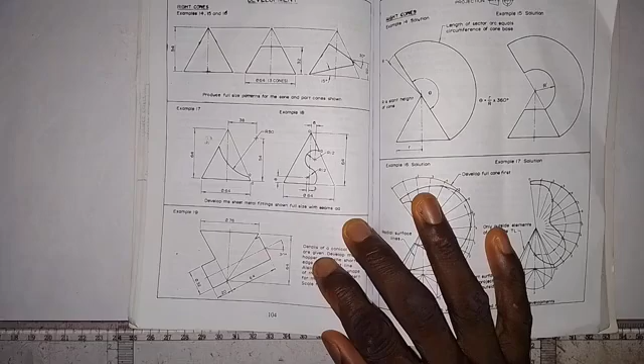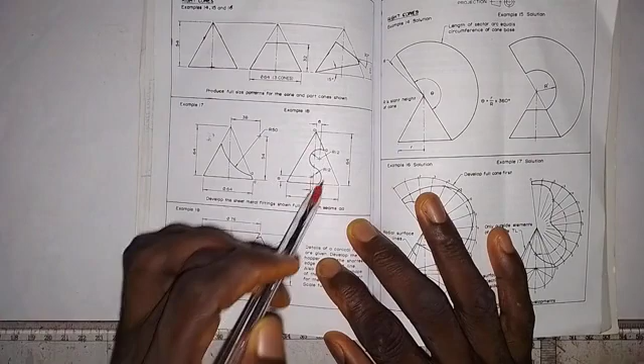Here we are going to solve this particular problem, and it has to do with the surface development of a truncated cone. This is a right cone, and as we see here, the cone is truncated in a very special way. So we are going to make surface development of this part, okay?

And the diameter of the circular base of the cone is 64 millimeters, and then we have the height to be 64 millimeters, and the radius of this arc here is 12 millimeters.

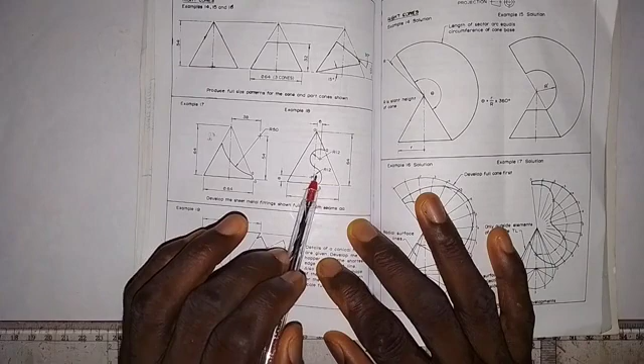And then, for us to obtain this point through which this arc is constructed, we have to take a measurement of 6 millimeters from here to here, and also we have to take a measurement of 3 millimeters to this side, and also we take 8 millimeters up. So that's where we are going to put the pinpoint of our compass with 12 millimeters to draw this arc.

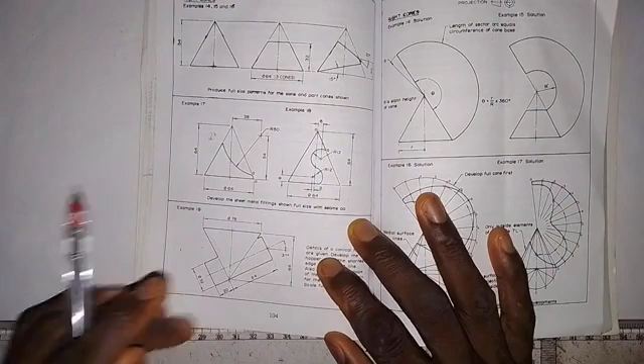So let's start and see how this work can be done. Don't forget that we want to make surface development of this particular truncated cone. So the first thing that we are going to do is to draw a horizontal center line, like this. Alright, then we are going to draw a vertical center line. We need to be patient to get this work done. We don't have to rush it. So we draw a vertical center line like this.

Okay, so as I've said, the diameter of the circular base of the cone is 64 millimeters. So half of 64 is 32. So we take a measurement of 32 millimeters here. So this is 32, and then putting the compass at this point, we are going to draw a semicircle like this.

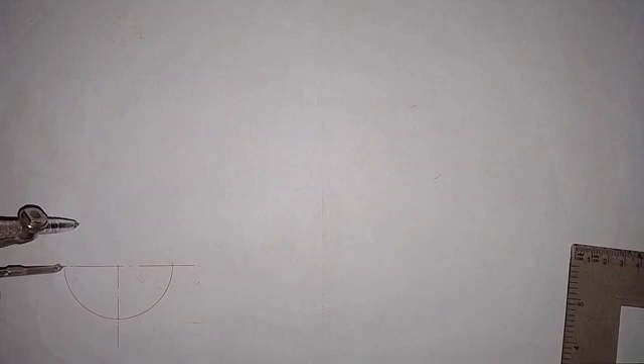Okay, so this semicircle, we are going to divide it into 6 equal parts. So putting the pinpoint of our compass here, make an arc here. Then we put it at this point, so we make an arc here. We make an arc here on this side. Then with the pinpoint at this point, we make an arc here.

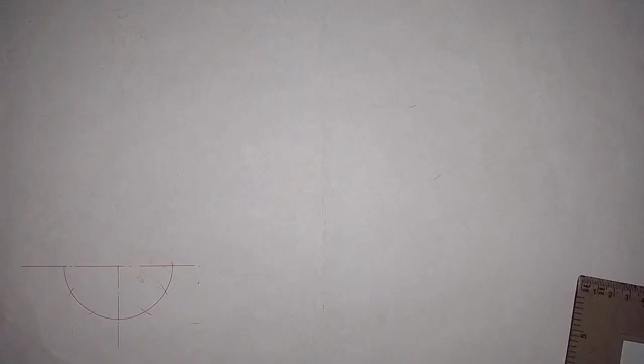So now we are going to number these points. Right from here, this is 0. This is 1. This is 2. This is 3. This is 4, 5, and then we have 6. Okay.

So having done this, the next thing is that we are going to extend this vertical center line. I think I ought to have done that before. Okay, so we extend it, and on this line we are going to take a measurement of 64 millimeters as the height of the cone. So from here, this is 64 millimeters.

So with this 64 millimeters, we are connecting this point 6 here with this point. That is the apex of the cone. So we connect it like this, and also we connect point 0 with the apex of the cone. So we join this together, like this.

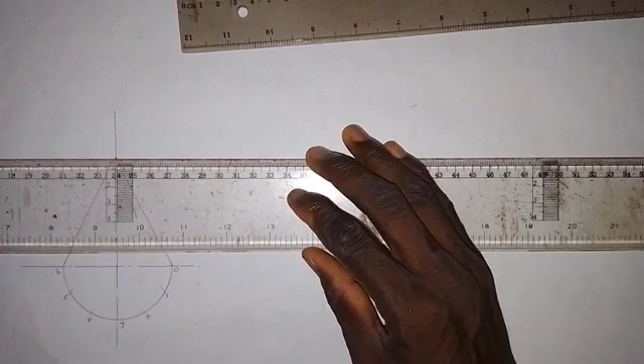Okay, so the next thing is that I'm going to draw a horizontal line from this point to this side. That is for the arc that we want to draw, and I will take a measurement of 6 millimeters from this point on this center line to this side. This is 6 millimeters here. So here I'm going to draw a vertical center line, just coming down a little bit from here. Okay, so this is okay.

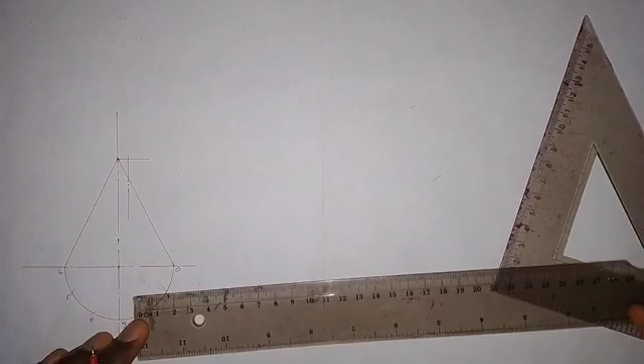So the next thing that I'm going to do is to take a measurement of 3 millimeters from this point here to this side. So this is 3 millimeters here. Okay. So then I will take 8 millimeters up on this vertical center line. So this is 8 millimeters here.

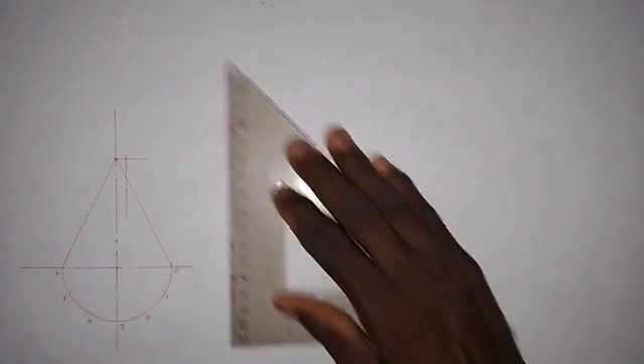So here I'm going to draw a vertical line. It goes up like this. Then from this point where we have 8 millimeters, I will draw a horizontal line. So that's the point of intersection. So the next thing that we are going to do is to draw the arcs.

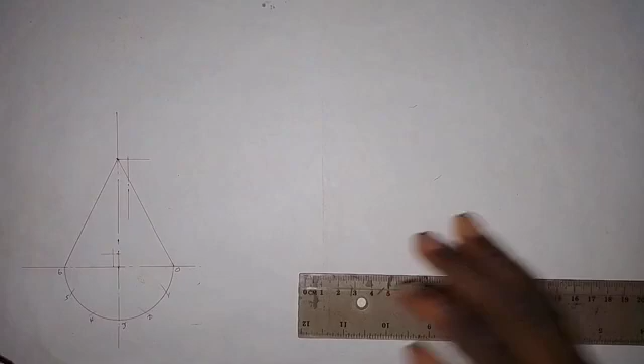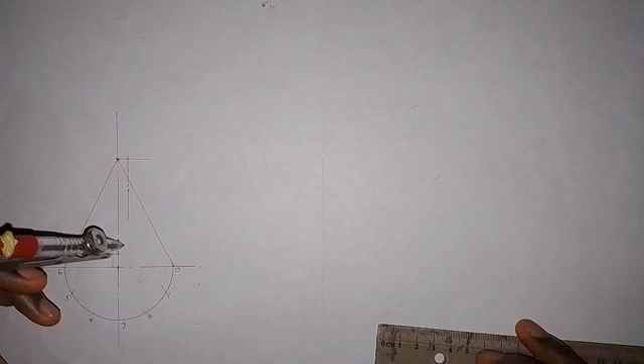So now I will take a measurement of 12 millimeters as the radius of the arcs. So this is 12 millimeters on my ruler. So putting it at this point here, I'm going to draw an arc from here like this, just to touch this center line. I will still need to draw this center line, keeping that 12. I need to bring it down a little bit because they need to intersect.

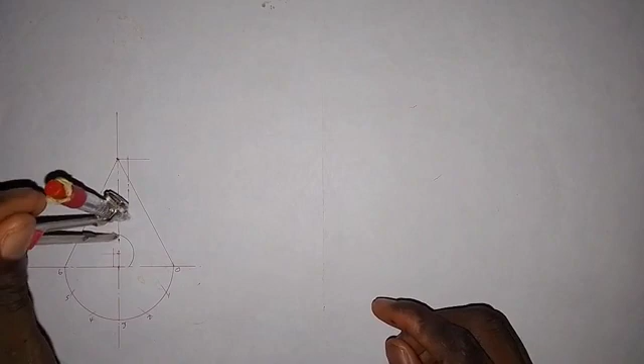Alright, so the next thing I'm going to do is locate the center of the arc that we have in this part, and to do that, I put the pinpoint on my compass here and make an arc on this line. So that is the center. Then putting the pinpoint on my compass here, it will touch this arc here. Then I will turn it like this. Alright, so that's how to construct the arc.

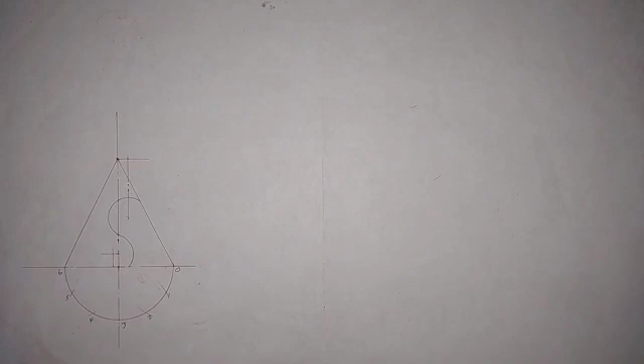So the next thing we are going to do is make this line. This line will be a thick line. So this line here is a thick line. That's what we have left after we have cut this part off. Then this will also be a thick line from here to here. Then I will make it a thick line from here to this end. So that is what we have left, and this is what we are expected to develop.

Okay, so the next thing I'm going to do is draw a vertical line from point 1 to meet the horizontal line like this. Then from point 2 I will draw a vertical line to meet the horizontal line, and from point 4 here I will draw a vertical line to meet the horizontal line. From point 5 I will also draw a vertical line to meet the horizontal line.

Then I'm going to connect these points with the apex of the cone. So I will draw a line from here. Then from here also I will draw a line. And from this point here, I will also draw a line. And then from here, I will also draw a line. Okay.

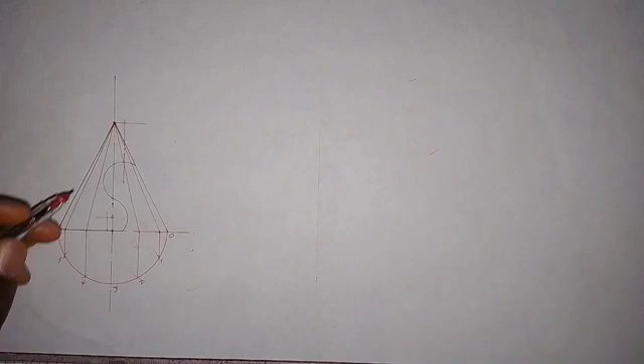So for us to work this curve out in the development, there's something that we need to do. I'm going to show you. Because of this curve, we need to make sure that we are able to produce this part in the surface development, and there is no line that passes through this part of the curve. So this is how we are going to do it. I'm going to get a point here on this part, most especially this sharp end. So I have a point here, and then I have a point here.

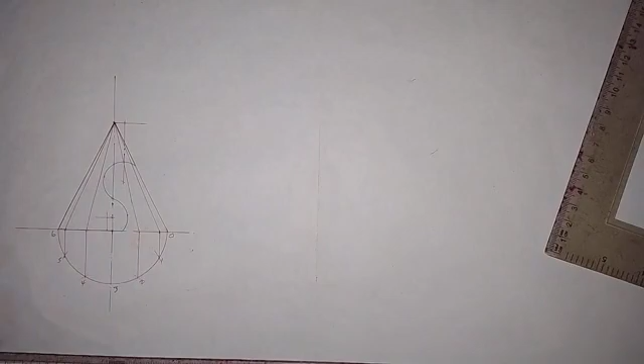Then I'm also going to work on this part, but just look at the way I'm going to do it. For this part here, I'm going to draw a line that will pass through this point. It goes up to the apex of the cone like this. Let me draw this line and complete it.

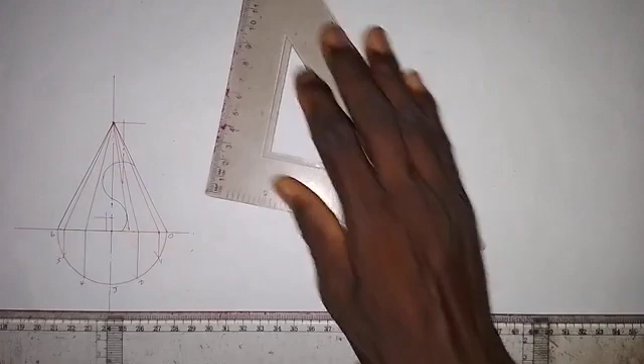So also I will draw a line that will pass through. We need this point and this point here. So I will also draw a line from here, through this point, meeting this point on the horizontal line. Then I will also draw a line to touch this particular point here. So this is it. Alright, so we have this point.

So the next thing I'm going to do is bring these points down onto this semicircle. So from here, I will draw a vertical line from this point down. And then from this point I will draw a vertical line down. Then from this point I will draw a vertical line down.

So now I'm going to label these points. This particular point here I will call point X, and this point I will call point Y. And this point here, that is in between 3 and 2, I will call Z. So let's take note of that.

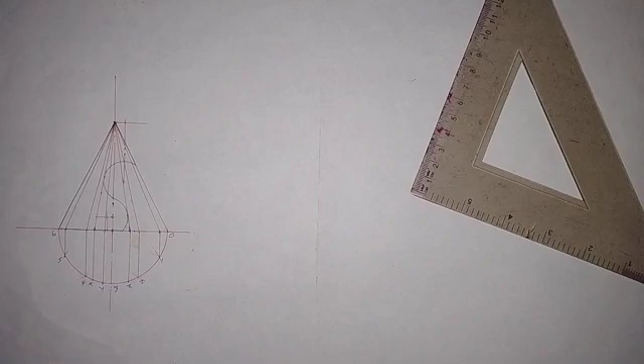Okay, so the next thing that we are going to do now is the construction of the surface development of this cone. I will draw a horizontal line from here. Let's call this point O, this point O here, and this point here will also be point O.

Next I will take this length from point O to this 0 here. Don't forget we are opening from this way, that's where we have the seam. We are opening it from here, so that is on this 0 line. So I will take this distance.

So we take a measurement from this point O to this point 0 here. That's the true length. Bringing it to this point here, we are going to draw an arc that goes like this. Since we are opening from this point, this is point 0 now, so we are opening from here.

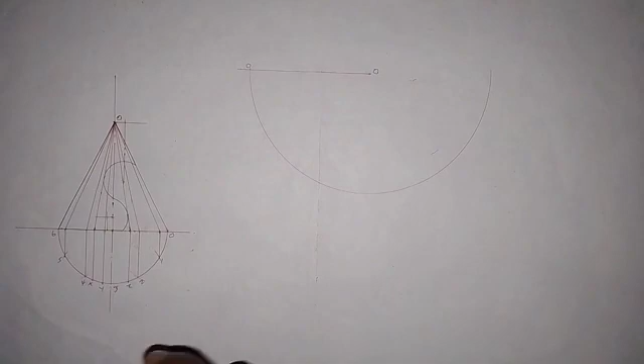The next thing we are going to do is make 12 arcs along this arc here. What we need to do is take distance 1 and 2, or 0 and 1, any one that we like. So just take 1 and 2. Putting at this point, we make 12 arcs on this arc here, so that this is 2 and this is 3. I'm going to pause the video and do the rest.

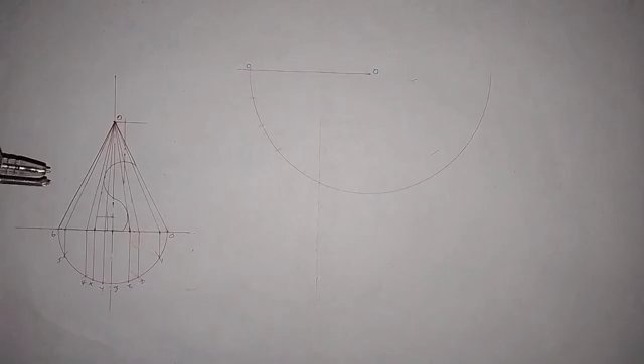Okay, so now I have done it. I've located the 12 points on the arc and numbered them from 0 to 6, with 6 in the middle as we have here. The next thing we need to do is take all the points we got, that is point X, point Y, and point Z, and get them onto this surface so that our work can be easy. How can we do that?

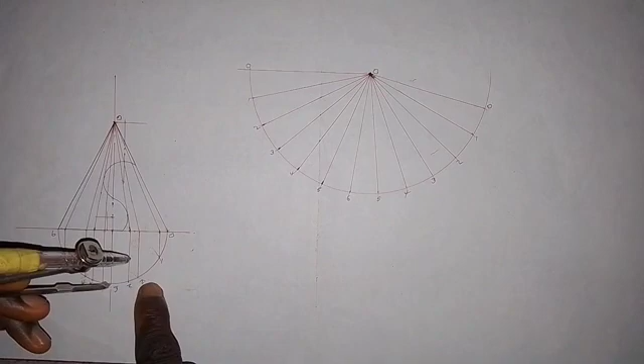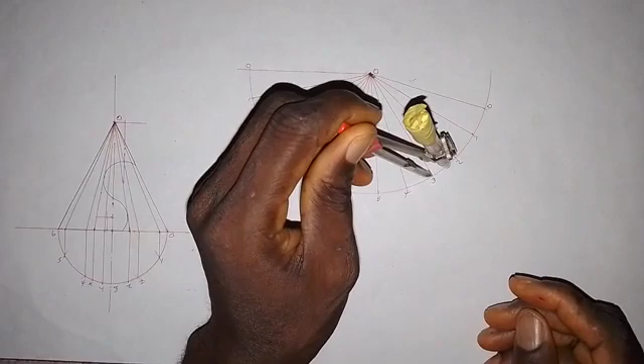If you look at this point 3, and this point 3 here, point Z is close to 2. So we put the midpoint of our compass at 3 here and extend it to Z. Let's get that first. We extend it to Z, then put the compass at 3, since it is close to 2. We make an arc here close to 2 - that's the first point Z on that side. Then I'll put at this point again and make another arc, close to 2. So this is point Z here.

So we have this point Z, and this point also is point Z here. Let's pay attention to that.

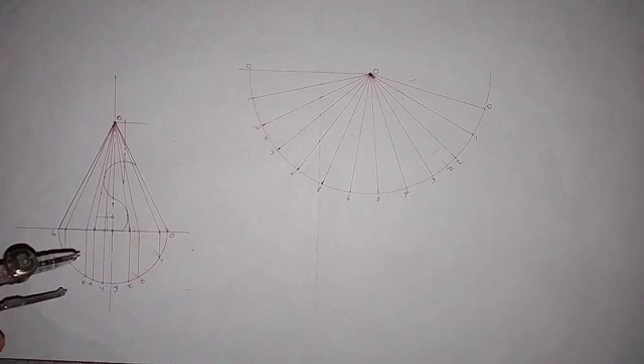The next thing is we need to get point X and Y. If you look at point X, it's close to 4, and point Y is also close to 4 or close to 3. So we just put our compass point here and extend to X - let's get X first. We extend it to X, take this distance, and put it at 3. We make an arc here - that's the first point X. Then we also put at 3 at this point, giving us the second point X on this side. So this is X here and this is X here.

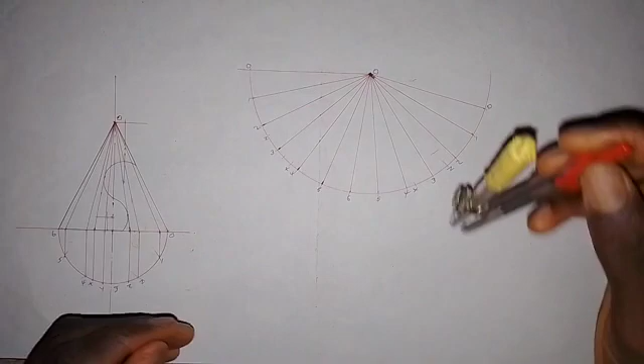Next we need to get point Y. From this 3 again, we extend to Y - this is point Y here. We take this distance and put it at 3, making an arc on this arc. Then we put it at 3 here and make another arc. Now we have point Y at this point, and we also have point Y at this point.

Now the next thing we are going to do is connect this point with point O, which is the apex of the cone. We connect this point Y to point O here.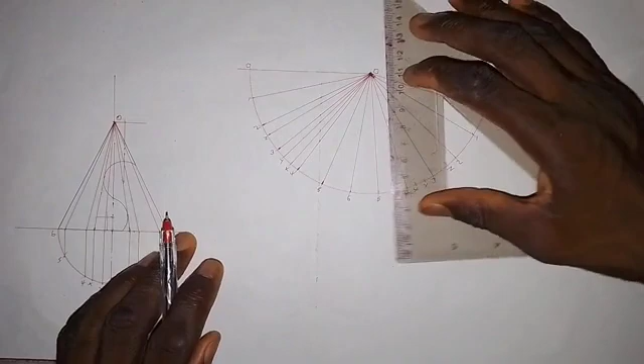Point X, we connect it together with point O. Then point Z here, we also connect it with point O. We come here and do the same thing, connecting point X with point O. Then point Y, we connect it together with point O. Then point Z, we connect it together with point O.

Alright, so I believe we are getting this. The work is going to be long to get it done, so you just need to be patient.

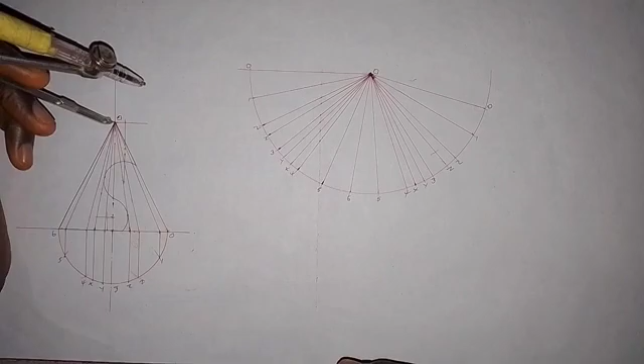So let's start the surface development. We start with 0. We put it at point O here and extend to this point 0 here, because that is where we have the seam. On this line 0, we extend it to line 0 here at this point, and bring it to this point here. So we make an arc on 0.

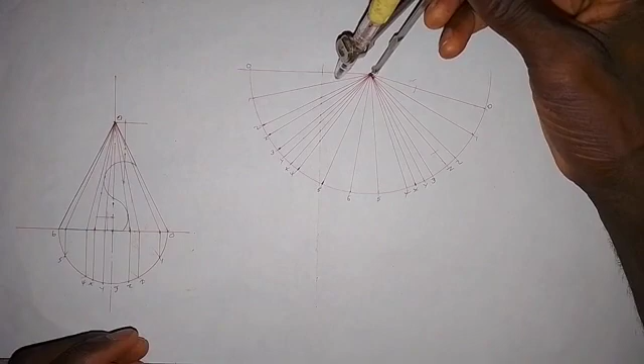Next we put it at 1. At this point we extend to 1, so this point here is on 1. We take this distance, put it at point O here, and make an arc on 1 on this side, and also on 1 on this side.

Next we also put it at point O here and extend it to 2, so we still have a point on 2 here. We put it at point O here, then make an arc on 2. We have to pay attention to these parts so we don't make a mistake. That is point 2 there.

Let's dot this point out. So we have a point here, and here. So we have those points on 0, 1, 2.

So then let's get to 3. From this point we extend it to 3. This is the point on 3 here. So we get this point.

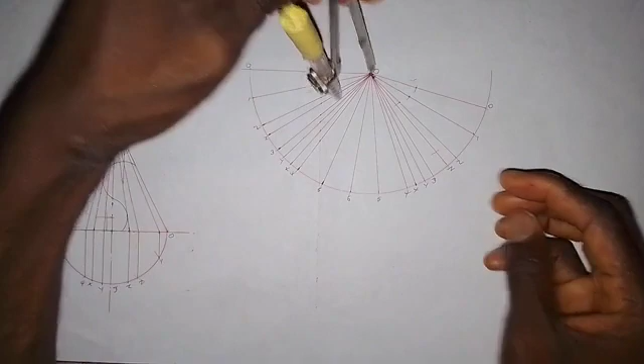But before that, we have point X, point Z here. So this is point Z. Let's take that, we have point Z here. We bring it to point O and look for line Z. This is line Z, very close to 2. So this is the point, and also this is the point. We have that point for Z. Let's dot it out, so we have this point, and we have this point.

Next we have point 3. From here we extend to 3, so this is point 3. We are working on the upper part first. We put it at this point and make an arc on 3. 3 is close to Z, so we have this point, and then we have this point. So this is point 3, and this is point 3.

Next we put it at this point and extend it to Y, so we have a point here on Y. There's a point here for Y. We extend it here for Y, take that distance, and put it here. So we make an arc on Y. This is point Y here, and also we have point Y. So here we have this point, and then we have this point.

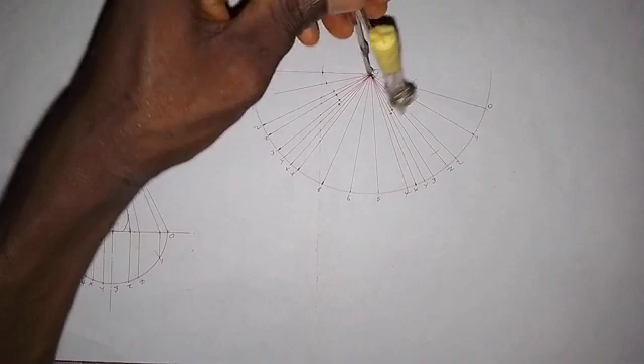The next one is we put it at this point O here and extend it to this point on X. X is just one point, so we have this point for X here. We take just this point alone for X, put it at this point, and on line X we make an arc. That is the point, and also this is the point. So we have this point, and then we have this point.

All right, so we are moving on. So the next one is, we need to come back here to this point, and then go for the second point on this line, line Z here, which is this point. So we take this distance and bring it here on Z, making an arc here on Z.

This is the point, and then we also have Z here, so we make an arc here. This is the point. So we take note of this point, and also we take note of this point here.

So then the next is, we also have a point here on 3. This point here, we have it on 3. So we take this distance from here to here on 3. Okay, so we bring it here, and here we make an arc on 3. So this is 3.

Okay, so also here on 3, so we make an arc here. So we have this point, and we have this point.

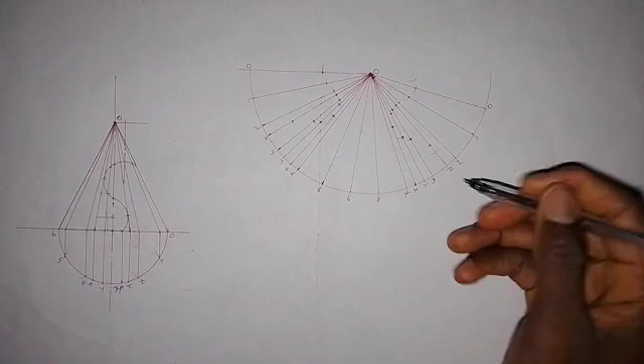This arc is towards Z, and then we also put it here. Okay, so we make an arc here. This is towards Z, so we have this point. So we have this point, and then we have this point. So this is point P, and this is also point P.

So we are ending everything. So what we need to do now is draw a straight line from here to here. We join this together with a straight line. Okay, and we also have the same thing here, so we join this together with a straight line.

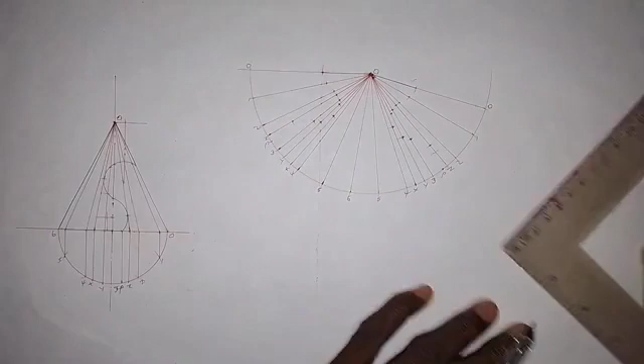Alright, so then with our French curve, we are going to connect these together. So I'm connecting this point together with point P. So this is it, connect together with point P. So it goes like this.

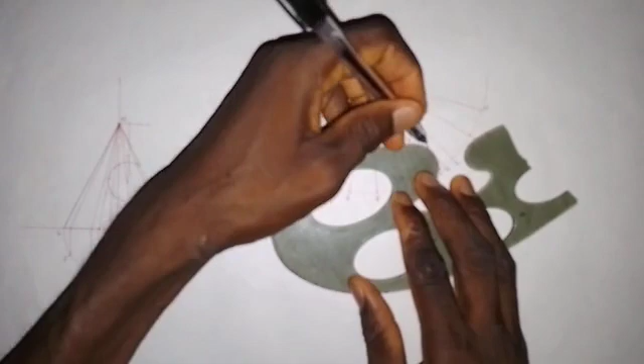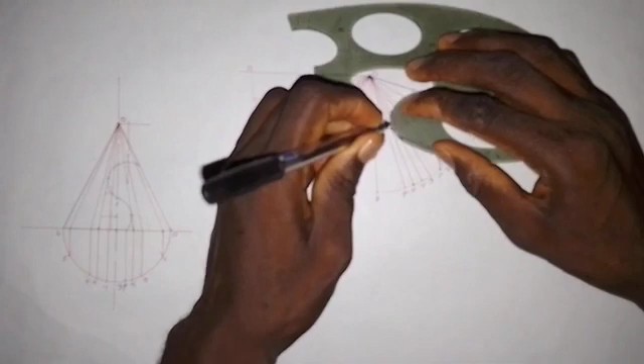Okay, so then I can connect these 3 points together. Then we are connecting this point together. Okay, so I can connect these 3 points together. And this, and then, so here, we connect these 2 points together smoothly.

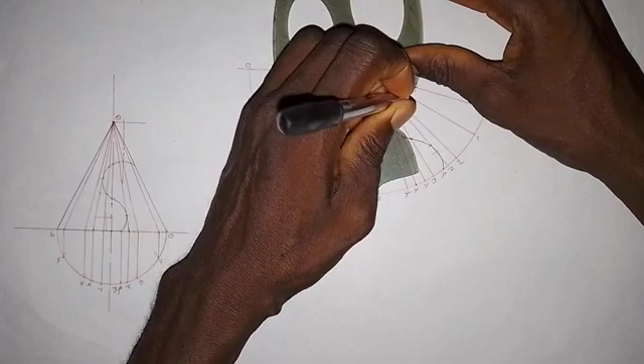Alright, so that part is done. So the next is, we need to connect these 2 points together, point P and this point. So we connect them together like this. Okay, so then, these 3 points, I will connect them together like this.

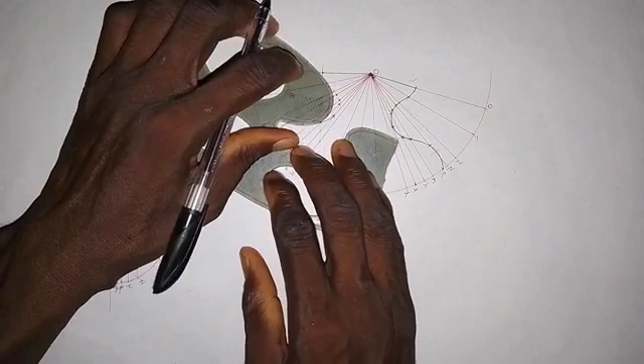So this point, I'll connect these 2 points together. Alright, so these 2 points, or these 3 points, I will connect them together like this. Okay, and this point too. Then here I will connect this together like this.

So the next thing that I need to do is make this black, to tick it out. I don't have to use my compass, I don't want it to cause an error, so I can use my French curve to do this. Okay, so to complete it, just draw from here to here.

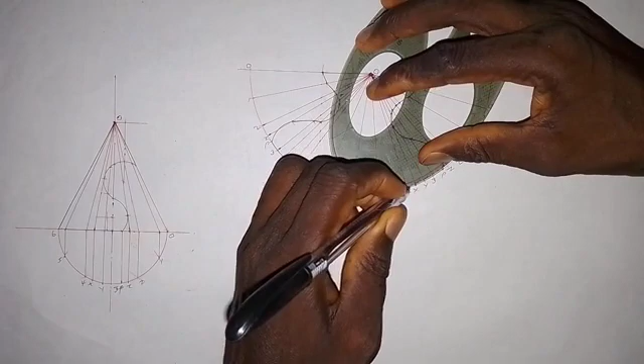Alright, so this is how the surface development looks. As simple as I've done it here, all you need to do is practice. When you practice, you become a master at it. Thank you and God bless you.